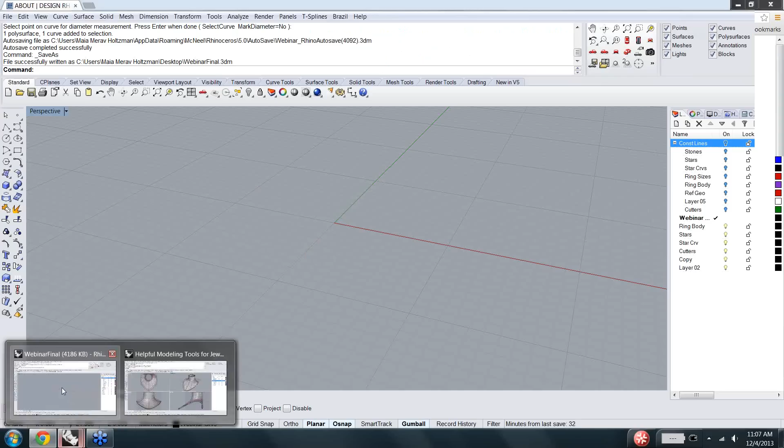And I know that a lot of the feedback that I get from people just getting out of design school is that they always are designing things that are incredibly beautiful and not makeable. So this webinar is going to get into a little bit of how to actually make stuff. I am opening up my Rhino screen here. I'm just going to go into my default four views here.

The first thing I do whenever I sit down to start making a piece of jewelry is get my caliper out. I know that sounds funny because it's a digital format, but my caliper is also digital. I really work a lot with thinking about dimensions from a practical standpoint, so I measure and reference pieces I've already made. I'm constantly thinking about what those measurements are actually going to mean in real life.

The caliper that I use, that a lot of people are always asking me about, is called a Mitutoyo caliper. It's a digital caliper, an absolutely beautiful precision piece of equipment. I recommend that if you are seriously considering making jewelry in Rhino, you buy one of these to have on hand all the time to work with.

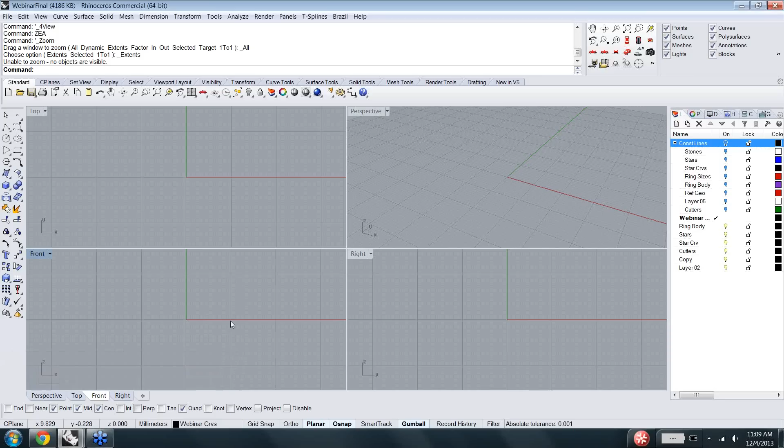The first thing I'm going to do right now when I start building an object is go into a file I've already set up, my helpful modeling tools for jewelry file. I have a bunch of different things in here that I can import into my new file. In this case, I have all of the sized rings already set up. I can choose a 6.5 sized ring, and with Control-C I can copy it to clipboard and bring it into my other file. I'm just clicking here and I have both of these available to me, and in my front view I can just Control-V to paste.

If I just go zoom extents, I have my ring set up in my four views here. And just turning on my grid there.

The first thing I'm going to do with this 6.5 size ring is move it from center to 0. So I select my object, find my center O-snap, and then type in 0, and that moves my profile curve for the inside of my ring shank to 0, which is the origin of my C-plane.

I always try to work around 0. A lot of what we do in jewelry is really symmetrical on both sides, and I like to think that we have the ability to make half of everything rather than an entire piece. Although I have a tendency to want to see the entire piece I'm working on, so I often do work in the full round. But I like to be able to just mirror things across really quickly, so I always try to start working around 0, which is the origin of your construction plane.

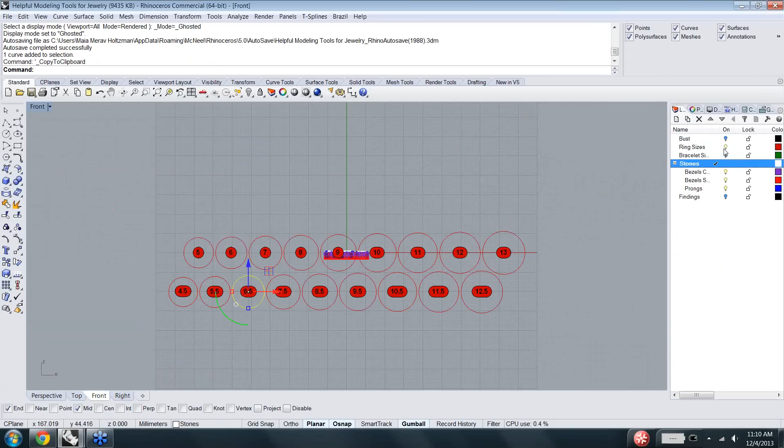The other thing I'm going to do for this particular project is first get back into my four default views, this little window pane, right-click here. Then I'm going to go back into my helpful modeling tools file and grab a stone. I have my stone layer, I'll turn that on, make it current, and turn off my ring sizes. Then let's go into my perspective view.

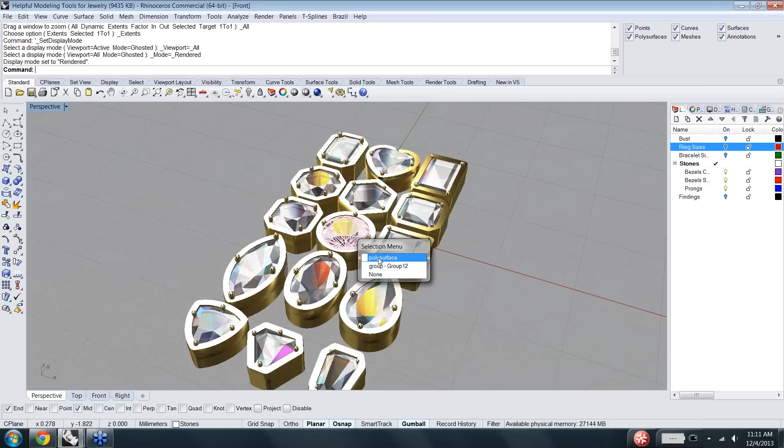If we look at this in rendered mode, you'll see I already have materials applied to these objects. These are a bunch of different bezels that are possible to pull out. In this case I'm not going to grab one, at least not just yet. But I am going to grab this single stone, and again Control-C to copy to clipboard, and then Control-V to paste into my other file.

For those wondering how I have two Rhino files open, if you minimize your initial file, you can then open up a new file. If you just do Control-O to open a new file, or Control-N to open a new file, Rhino will close the original file down. But if you want to have two open at the same time, all you need to do is minimize and then open. So I can minimize those down and grab a new file from my desktop, or start a new template in Rhino 5, and that's how that works.

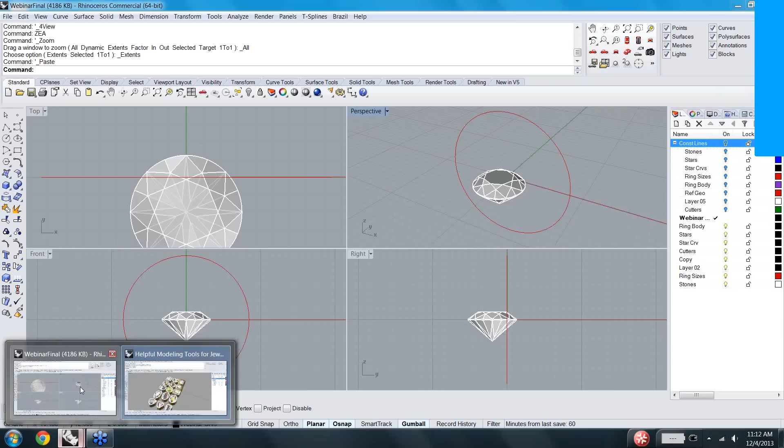So again, with my stone, I'm going to center this around 0 as well. The easiest way to do that, and a way for me to keep the ability to move this stone around, because it's got so many facets, there's no actual center, I can find the area centroid of the object, but if I'd like to find the center of my girdle here, I'm just going to do a circle, 2 points.

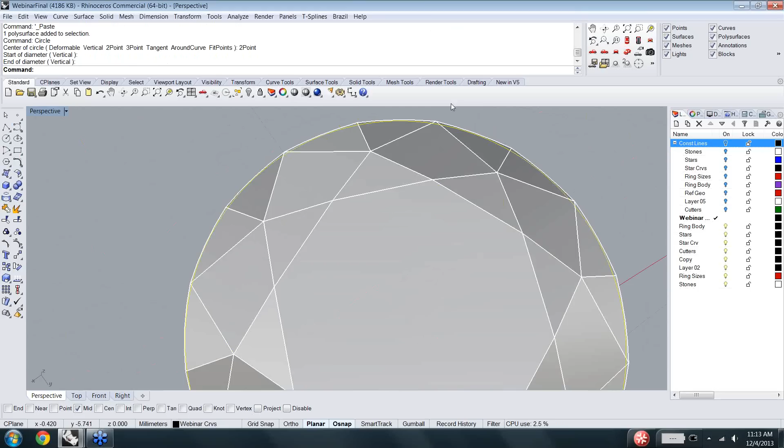The start of my diameter, I'm just going to have my mid O-snap on here. I'm going to go to the mid of one of these little faceted edges, and then I'll drag this around and go to the mid of the other side. You'll see that I've created a circle around what is not actually circular, because this is really a faceted object. But that circle allows me to work as though the stone is circular.

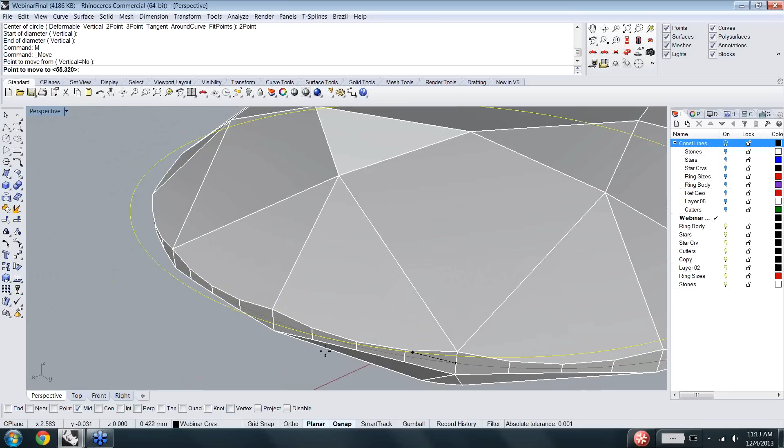So I'm going to also move this up to this top point here. So M for the move command, and then move from mid to end. Let me turn on my end O-snap. Then I'll go ahead and select both of those objects and group them together, so that when I select them, they will be both chosen at the same time, as you can see.

Now I can move my stone from center to 0, and I know that I've actually placed that stone directly on the center. I'll go into my top view for 1 second. You can see that it's really lined up with my axes on the top construction plane.

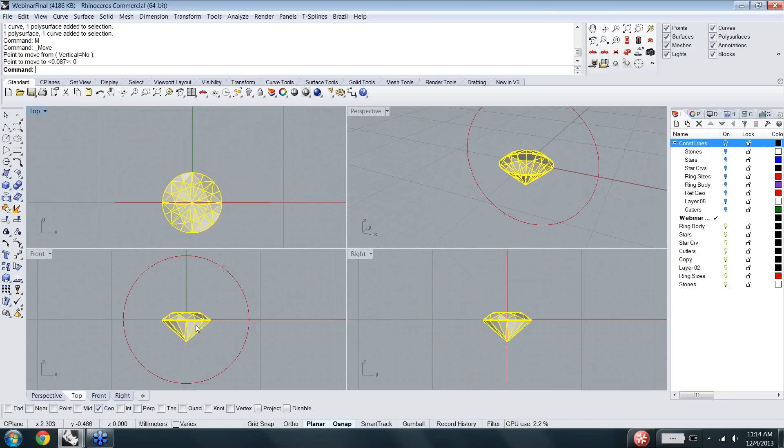And then I'll go ahead and in the front view, I can move this stone with ortho up somewhere around there for now. It's not a definitive placement, but just because for this design I know I want my stone centered.

I'll go ahead, you see that the layer that was imported is called stone, so if I turn that off, the stone will just go away for a little while, and then I can select that curve, which is grouped with the object but on a different layer. I'll change my curve using the change object layer command, right-clicking over my stones layer, going to Change Object Layer, and just changing that. So now that curve is also hidden with the stone.

So when I'm working in Rhino on an actual freelance job where somebody has given me an image, hopefully it's dimensioned, often it's dimensioned improperly or kind of dimensioned, the first thing that I always do is import that image into my Rhino viewports.

So I'll go ahead and do the picture frame command. It's also in your surfacing menu right here, this little multicolored screen icon, picture frame. The other thing you can do is actually drag and drop files, JPEGs, into the individual viewports. But just for the sake of this exercise, let's go ahead and do the picture frame command.

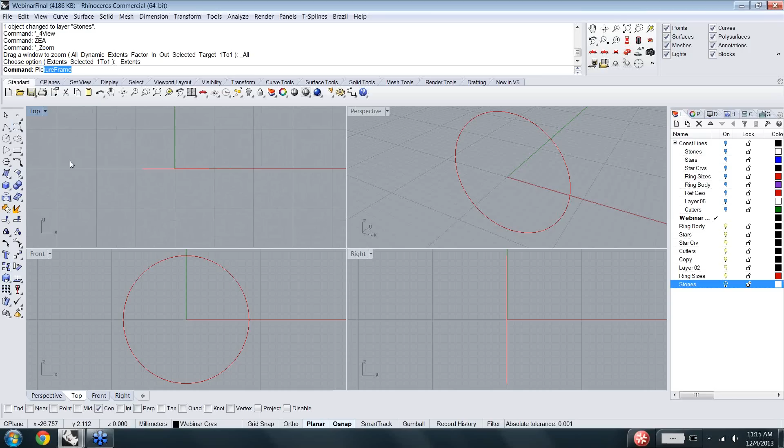This takes me to my desktop, and I have an image here called top, which I've already set up. I'm going to double click there, and then in my top view, I'll start in the lower left-hand corner and drag out what is just a simple planar surface, and left click to set that down in space.

You'll see that I've just dragged in an image that is the top down view, the plan view of the ring that I'm going to be making, or sort of making. I'm going to be making something slightly different, but I'm just showing you guys a bit about how to dimension your images if you're working directly from one.

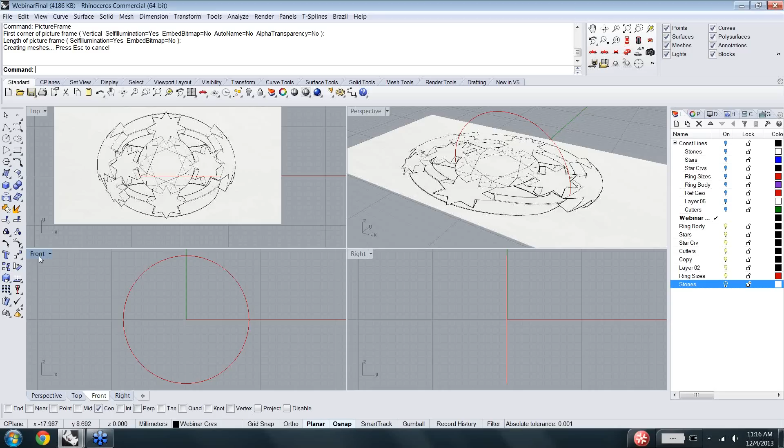So I'll do that in the top and the front view as well. Right-click to re-engage my command, picture frame, front, and then just zoom out a little. These don't have to be exact at the moment because we're going to scale them to make them fit exactly.

And then I'll do the same thing in my right view. Right-click to re-engage, right image, hold shift down for ortho so that you get that nice straight line at the bottom there, and then just drop your image in. I'm going to go ahead and select all of these, make a new layer, and I'll call it picture frames.

I'll right-click over that layer and say change object layer, so that now all of my picture frames are on that layer. Then I'll select all using that layer, select objects, and go into my properties menu, one of my tabbed panels on the right under properties.

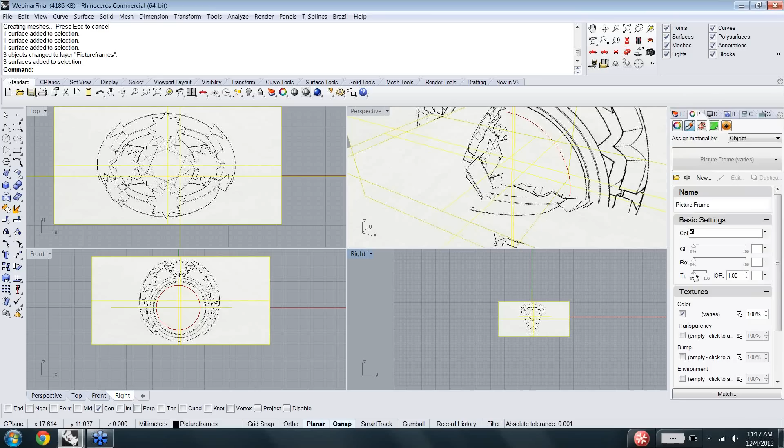I'll select material, and you'll see this picture frame, which is the name of the material. As I start to drag my transparency slider up, I can make these images more transparent so I can see my construction plane behind them, which is really useful. Once I've got my transparency up to about 60-something, depending on the image, I can go back into my layers.

So the first image that we're going to work on in terms of dimensioning is our front. You can see that the actual ring size is already here, and what I want to do is key in my image to the ring size. That's the easiest way to get a really good sense of what it is that we're creating.

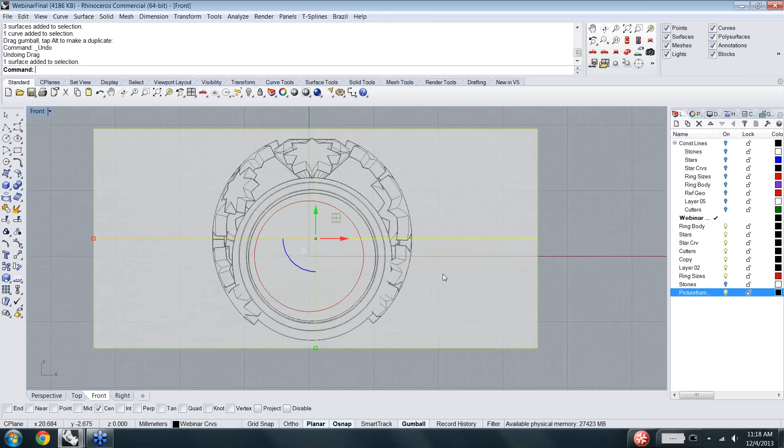I'm going to go ahead and scale this 2D, just sort of eyeing it out. The way I can do that is by turning my gumball on and dragging one of these handles, either the green or the red. Let's scale the picture frame towards the image with the shift key down so it goes in an equal scale. If I don't hold shift down, you'll see I'm just scaling in 1D, so I want to hold shift to make sure I get a 2D scale.

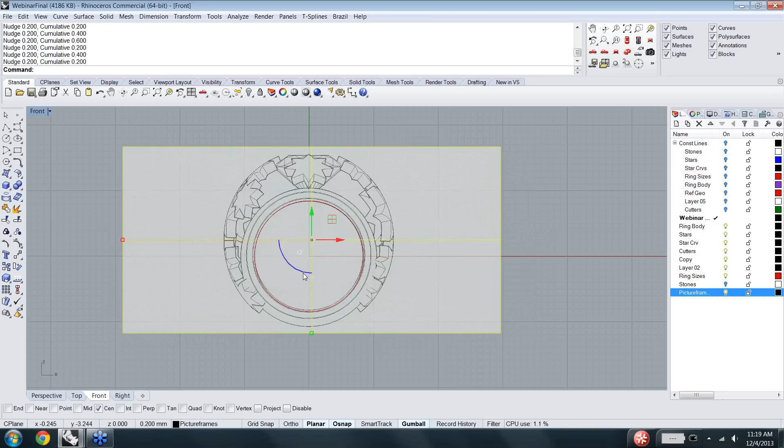I'm going to eye it out first, and just use my nudge keys to move my picture frame around until I get something I'm basically happy with. You can always adjust a little bit more if you feel as though it's not quite right. Once I have it set down like this, the first thing I'll do is trim away the excess.

This picture frame is just a planar surface, so I can treat it as a planar surface. I can use my near O-snap to slide along the edge somewhere, snapping to near using my rectangle corner to corner. It doesn't even have to be perfectly centered, but because I'm OCD, I like it to be. So let's move it over a tiny bit more, then engage my trim command and get rid of the excess on the outside, and then I'll lock this.

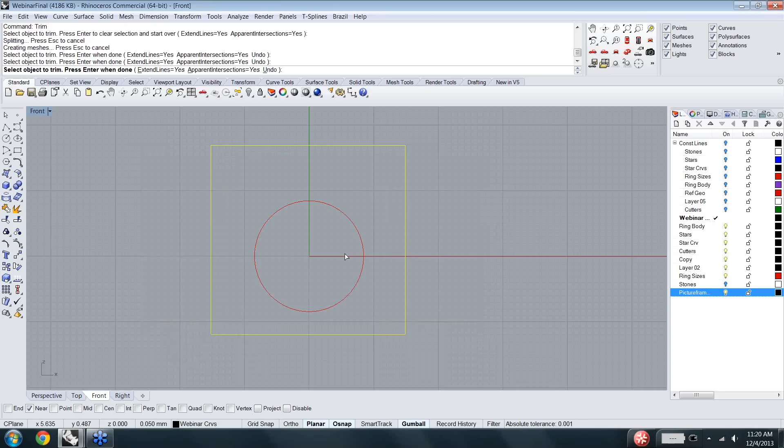So I'll lock my picture frame. That way I can no longer move it around at all. Then in the top view, I'll start scaling this piece down using the first scaled image as a reference point.

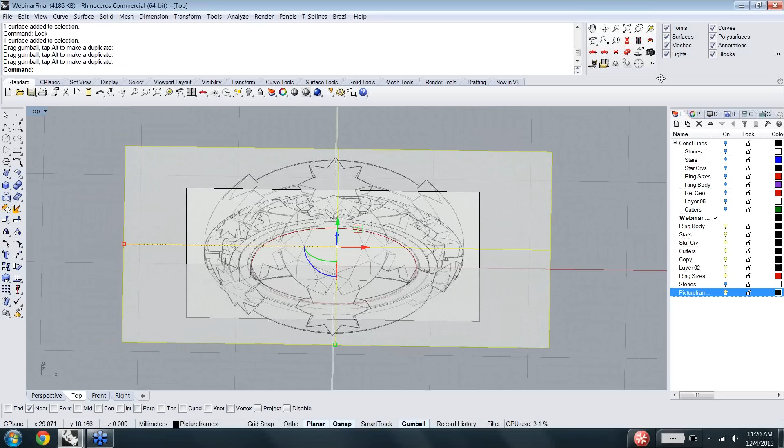Let's just start working on it. Basically, we're working on this without exact dimensioning, which makes it a little bit both easier and harder, I would say. Because I need to find the center of this object, I'm going to add a circle by diameter - circle, 2 points, start of diameter. I'll put my cursor somewhere here, and then very carefully with ortho engaged, drag out my circle until I find what I think is the exterior of that stone.

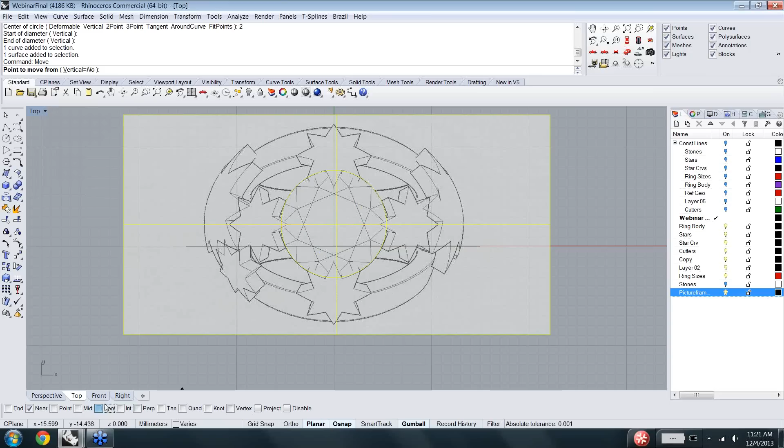If I know the exact size of the stone, that also helps - I can put a circle down and scale to that as well. Now I'm going to orient these two first to 0, so I'm going to move from center of the circle to 0. That just places this, because we can't rely on our picture frame to be centered exactly.

I can't use my mid O-snap - I'm not sure that these are going to be equidistant on either side. So this is going to orient me based on that circle. Then I can go ahead and just see if my edges are intersecting. I mean, they basically are. For the sake of this, because I'm not completely using this for the demo, I would say it's slightly something like that.

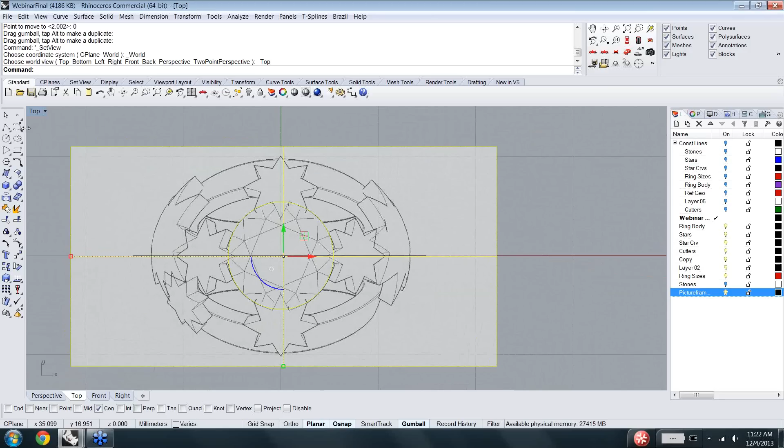Then again, top view, rectangle. We're going to do corner to corner again, so let's have our near O-snap on. Using that rectangle, I can do the trim command, get rid of my excess, enter, and then select and lock.

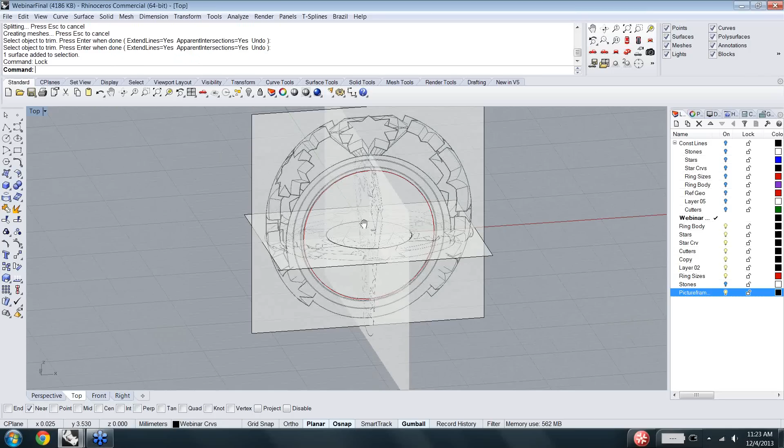So I've now set up these two intersecting images, and this is great just in the sense of understanding the CPlane functionality - so we see why we need to work on different CPlanes, since we have different views that relate to the CPlanes in terms of being parallel to them. So finally, in our right view, I'm just going to hit my right tab here, viewport tab. We're going to do the same thing.

We're going to just move this around a bit. I can go ahead and, using my nudge keys, move that up.

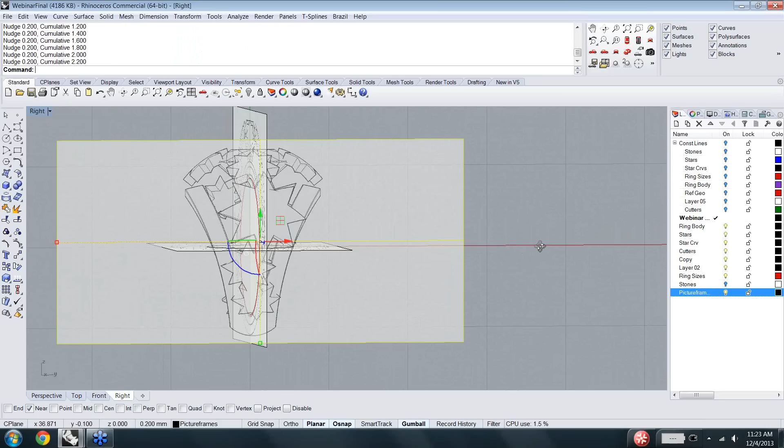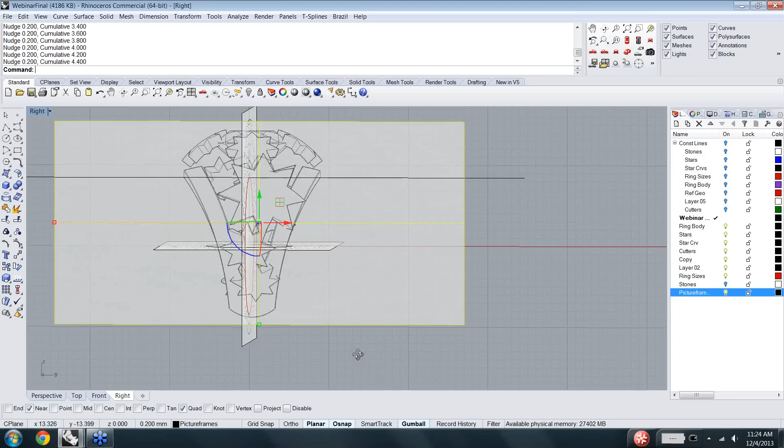I see that this is the interior of my circle, and this is the interior of my circle that makes up my inner ring shank. So if I go ahead and do a line from midsection, or both sides, from the quad point of the circle at the top, and I just drag that out, I know that this needs to be there. And then I can kind of get a sense that now I see that this really isn't large enough. So I'm going to go ahead and scale until I think that I've got it more or less right, just looking at this.

So let's say something along the lines of this. It's not quite perfect, but for the sake of the work that we're doing today, it will suffice. And you can really get this perfect just by keying into specific measurements that you are aware of.

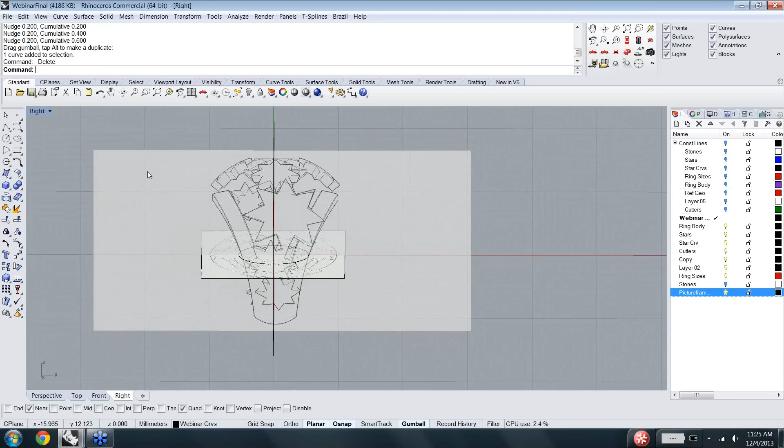So again, rectangle. Let's trim away the excess using that rectangle. And then I'm going to select curves, SelCrv, and I don't need any of those curves anymore, so I'll delete them. I don't want to have to be bothered with them. And everything can be locked.

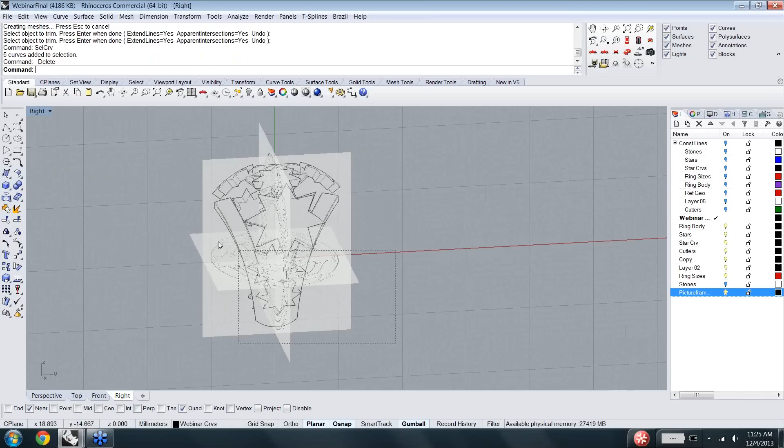So now I have this grouping of images that I can start to work from. I think I actually just deleted my ring size, so I'm going to undo that. And I did. Okay, SelCrv for select curves, and then I'm going to deselect using Control and left click that inner ring size, and then delete my curves. So I have the original ring size that I do want to keep.

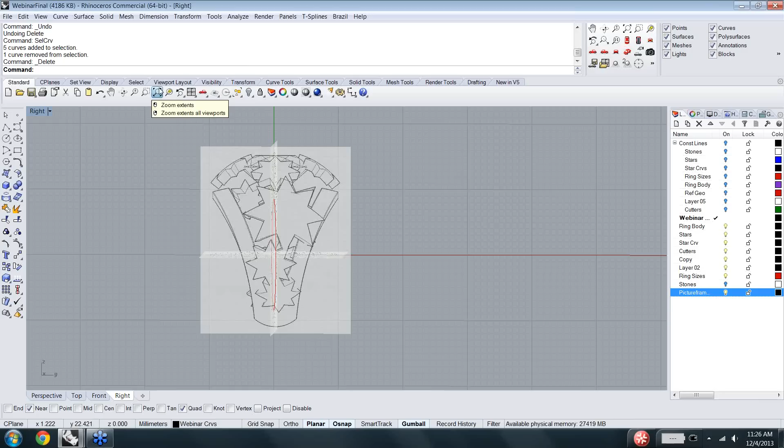And now, for the time being, while I work on this, I'm going to start working in the right view. So zoom extents. I've already created my curves, and this thing goes so fast. So I'm going to bring my curves in with my construction lines layer. You can see that they're slightly different than the curves that are in these picture frames. So I'm going to turn the picture frames off, I'm going to start working on this object as though there were no picture frames. So what we have here, I'll just hide these two for a second,

is what basically is the original setup for building a ring. I'm going to create a single line which defines the height of the base of the ring shank. I'm going to then create another single line that intersects that line that defines the width of the ring shank.

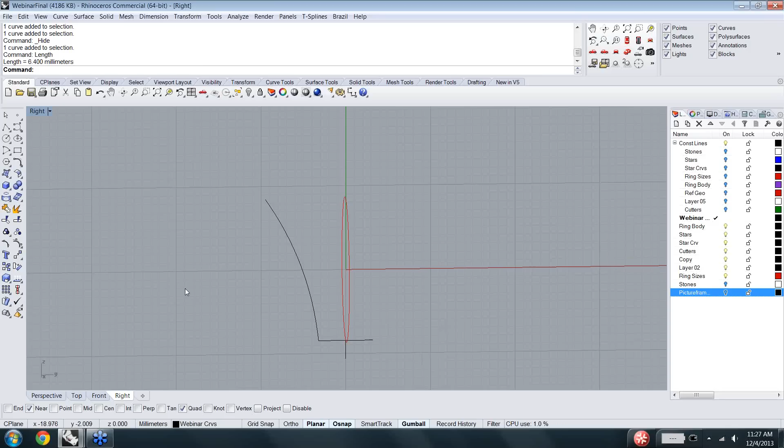So in this case, I have a single line, the length of which is 6.4 millimeters. Why 6.4? Well, it's going to be a big ring, but the 0.4 millimeters is to account for polishing, final polishing. We lose about 0.2 millimeters of material during final polishing of a material like 18 karat gold. And we always have to think about what's going to happen to our models before we even start to build them in terms of how the post-printing processing will affect this object.

So there are two concepts. One is the concept of material loss, which is what happens in the polishing process. The other concept is the concept of shrinkage, which happens in the casting process if we're doing multiple waxes from a mold. In both cases, we are going to want to think about how we build our object before we start building it in order to account for those. And the issue with shrinkage we can deal with at the end of our model making, while the issue of material loss we can't.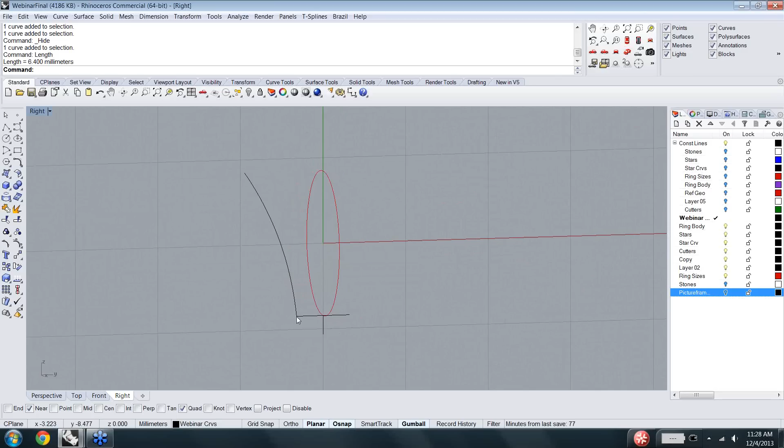So right now I'm going to create my original curve. The way that I built the profile curve for this object is to create two straight lines, 1 millimeter and some each, and then an arc. So I do the arc command and then end, end, and end using that single line object there. Delete one of those. And then I just use Control-J to join these three individual segments together.

And I had my stone in place. Let me bring my stone in from my original model. My stone in place here, this is the actual size of the stone that I'm using. And so I built my curve, the other top profile curve of this object based on that stone.

Then, as you can see, I created a curve here using my curve command or control point curve. And the way that you do that is you just snap to the end here and you start moving out in space. So let's just turn off—you can hold the Alt key down to turn off O-snaps. And then at the end I do want my O-snaps. You can hold Alt down to turn off O-snaps, and then you can let it go at the end to snap to that curve there. What happens with a curve like this is that then once I've created it, I can turn my control points on using F10 or the points on command, and I can start adjusting the curve using nudging.

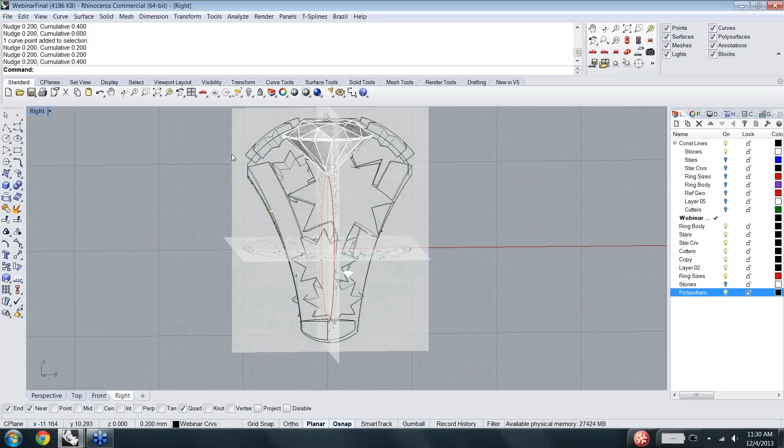I can get this curve to follow the curvature of, for example, my picture frame has a specific curvature, I can actually build that into my image.

Once I have my curve set up the way I'd like, I'll turn those control points off with F11, select last, and do the Fair command. Fair gives this curve a nice smoothing of its curvature with a tolerance, in this case set to 1 millimeter. You see it just adjusts it slightly, setting it up to be a better curve for building objects with.

So if you have a curve that's a little bit wonky, you can always fair it and make it a little nicer. I have my center inner ring shank curve, and this external shape that defines the outside of my ring from the right side.

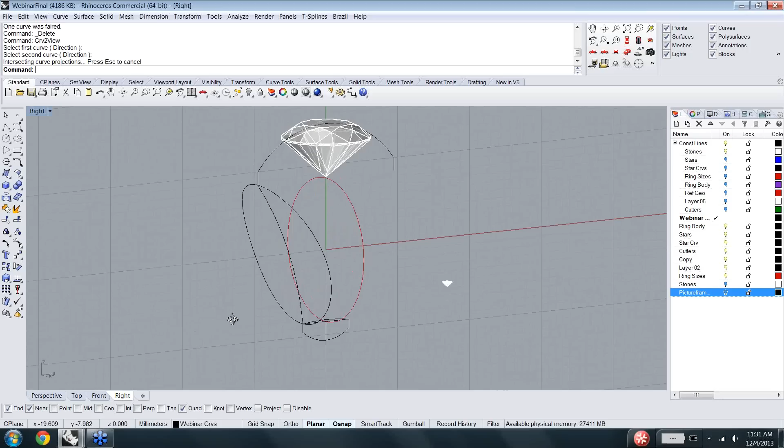I'll do a command called curve from two views, CRV2view. Rhino prompts me to select my first curve - I'll select the red, then select the second curve here. You'll see Rhino's created the external portion of my ring shank using the curvature of that curve to flow this center curve along.

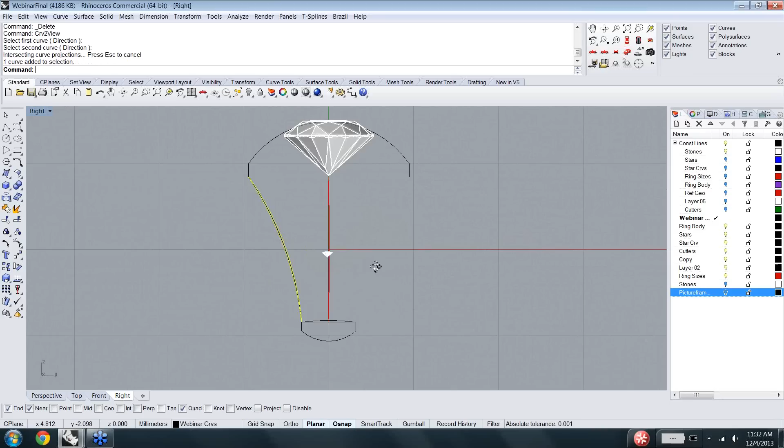This is great because the top portion of these two is still lined up, even though this now has curvature to it. It's not planar. Then I'll go ahead and do the mirror command.

I have mirror in my aliases already set up, but you can find the mirror command in your transforms cascading menu. It's the command I use probably the most of all the commands. In this case we can just mirror across the y-axis, so I'll type in y, and you'll see I have those two edges of my ring now.

The first thing I'll do is take a look and make sure I'm happy with all of these curves. Now I'll change my current layer to ring body, and do a sweep two rails command.

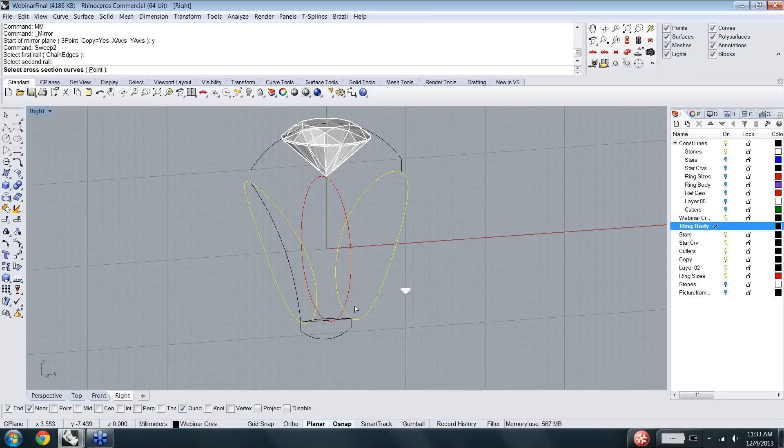Sweep two, select the first rail - always select these on the same side, or you can sometimes get a weird result. I'm going to select this in the back, and this in the back as well. For my cross-section curves, I'll choose this group here and this group here and hit enter. You can see it's used that cross-section to reference and this cross-section to reference.

I'm going to select closed sweep, preview, and you'll see now it's gone all the way around. So for somebody like me that likes to see the entire piece and not work in the half, this is why I choose to do closed sweep.

I'm going to turn maintain height off for this. Maintain height attempts to keep height consistent, but in this case we have two different heights so it can't completely maintain the height - it attempts to find a middle ground between these two sizes as opposed to gradual tapering down towards the smaller size. So I'll keep closed sweep on, maintain height off, and say OK.

And I'm just going to change the color of that layer to green. Not that one though. And there you go.

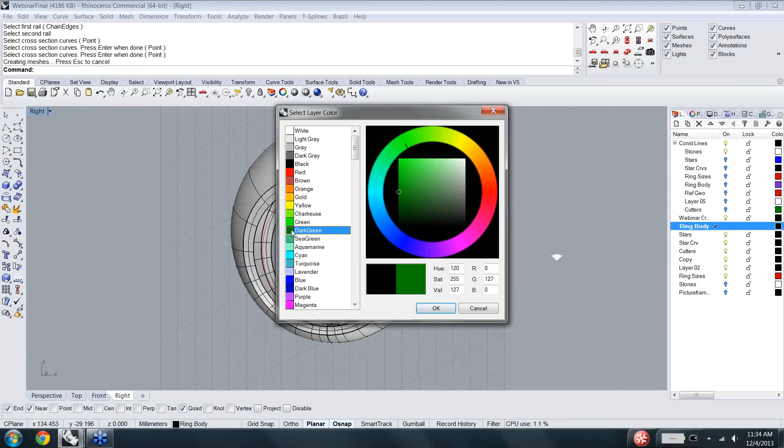Then I'm going to do another sweep two rails using this small curve I've created here. It's another arc - I just eyed this arc out when I built it. I snapped from quad to quad using my quad Osnap, then pulled up with ortho engaged a little bit to create this rounded characteristic.

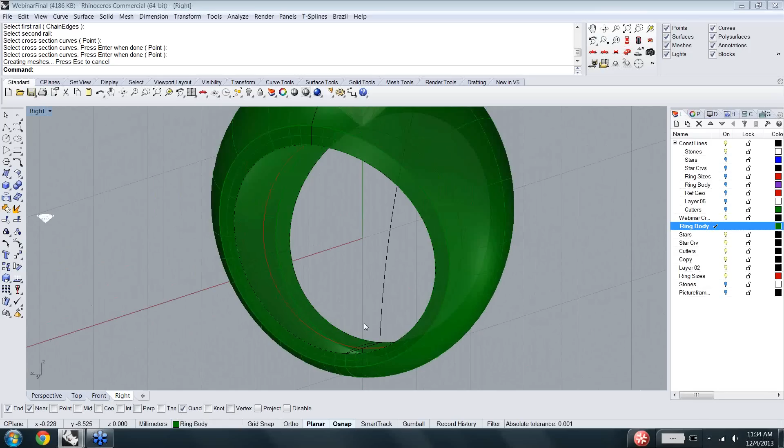It just gives, you know, they call it the comfort fit ring thing. I don't know that that's the nicest imagery in the world, but it is very nice to have a not completely flat interior to your ring, even just in terms of wearing the ring.

So I'll go ahead and do another sweep two.

I'm going to choose my polysurface edges rather than the curves, just because sometimes the curves get messed up. The edges will always maintain tangency with that sweep. Then I'm going to choose that as my cross-section, press enter, and in this case I do want to maintain height, so I'll say maintain height, and close sweep, OK. And you'll see that I've just created the beginning of a ring.

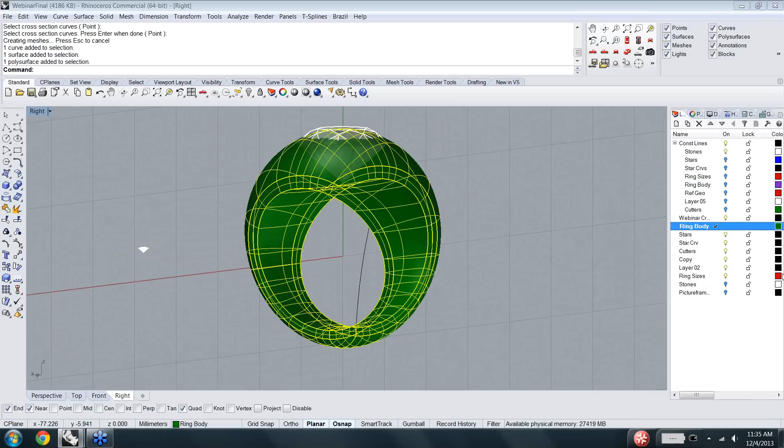Now I'm going to select these and hide them for a sec while I make another interior portion of my ring. So I'll do the sweep to two rails again. Select my cross-section curves, this one is the only one I'll select now. Hit enter and maintain height. So you see that this is keeping the height of the original profile curve, even though it gets larger. This is going to be the interior of my ring.

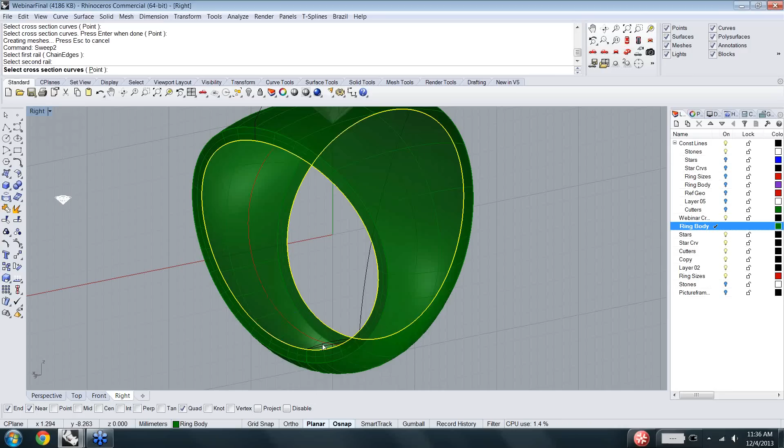I'll say OK, and then again I'll do this sweep using the edges of my poly surface, and using this arc. I can say maintain height again. Close sweep, OK. So this is going to eventually function as the inside of my ring shank.

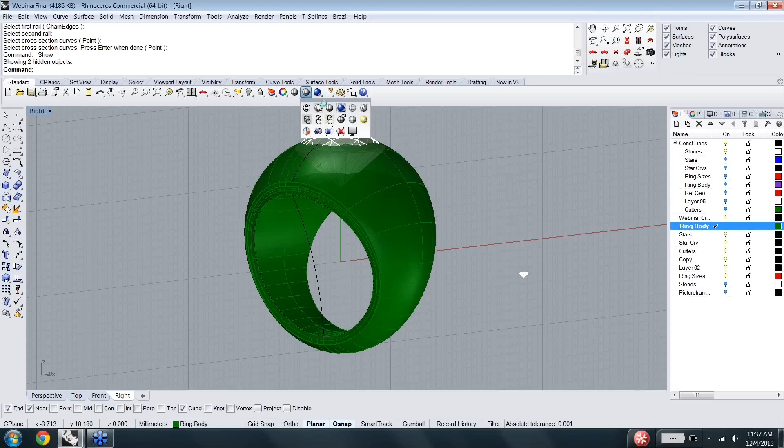What I like to do at this point, right-clicking here to show objects, is just to take a look at my object. In Rhino we have this really nice tool for jewelers, called EMAP. I'm going to right-click on my display modes and go to rendered viewport. I'll right-click there also to change all of my viewports to rendered. And now I'll go ahead and look at the curvature of my object to make sure I'm happy with its shape.

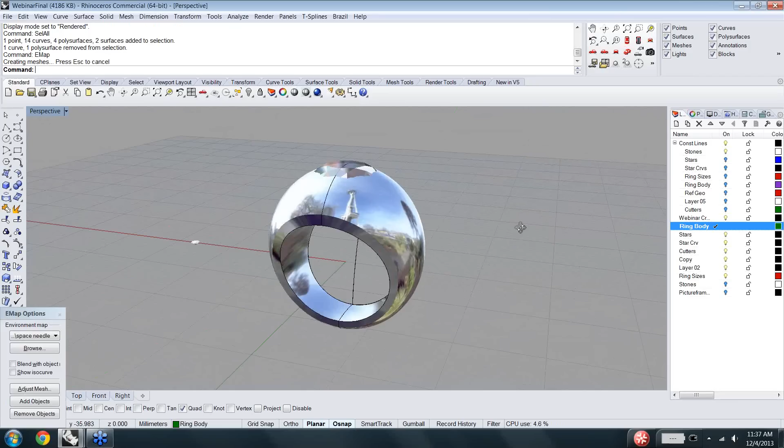I'll go ahead and select all, so SELALL or Control A, either one, deselect my stone, and type in EMAP. You see that we've applied a metallic finish to the surfaces, which has a reflective quality and a light source. This is a really excellent tool for just checking to see if you're happy with what you've built so far.

Assuming you're happy with what you've built so far, what I always do at this juncture, so as not to lose all this information if Rhino crashes, is Control A to select all, then hover over my layer called Copy, right-click, and click on Copy Objects to Layer. And then I will save.

Now if something happens, if I create too many surfaces and my file gets really heavy and my Rhino crashes, I can always find this again on my desktop and it will not be in any way damaged. Sometimes the files when they crash, although I haven't had it happen to me in Rhino 5 yet, do get damaged. And then you hate yourself because you have to go back and start from scratch.

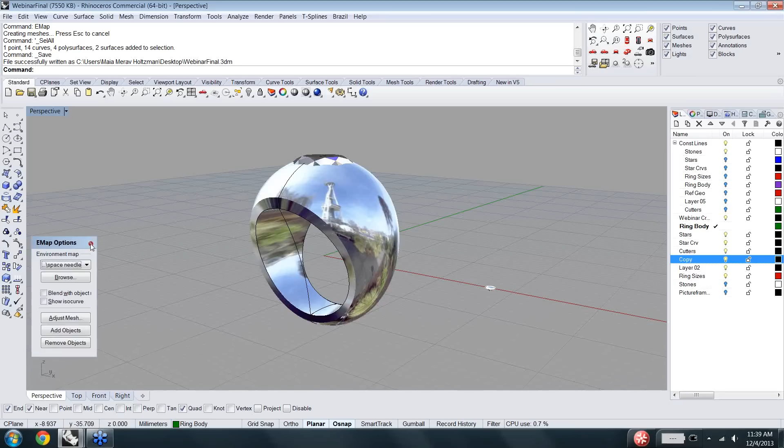So I'm going to turn off my EMAP. You get this little pop-up window, I just click out and it goes away, and I'll go back to my ghosted display mode.

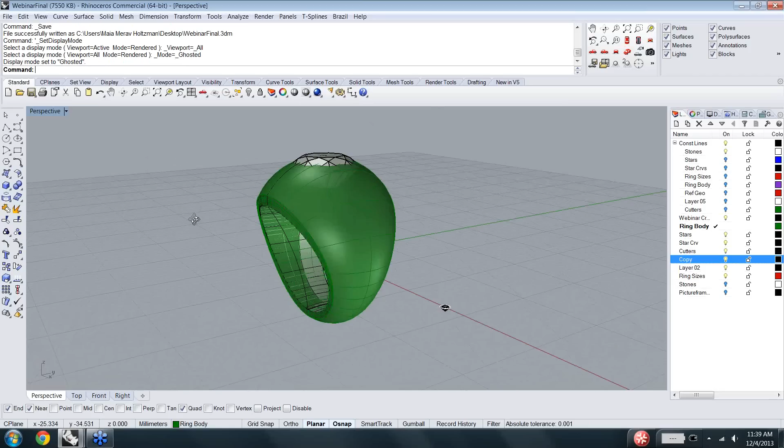The next thing I want to do here is start applying stars to my surface. Now, a lot of you guys know about the project command, project curves. I generally find that's really good if you're projecting parallel to your C-plane, your construction plane, and if you don't have too much curvature. But when you have a lot of curvature, like a ring like this, there is another way to apply motifs to the object that is a little less skewed.

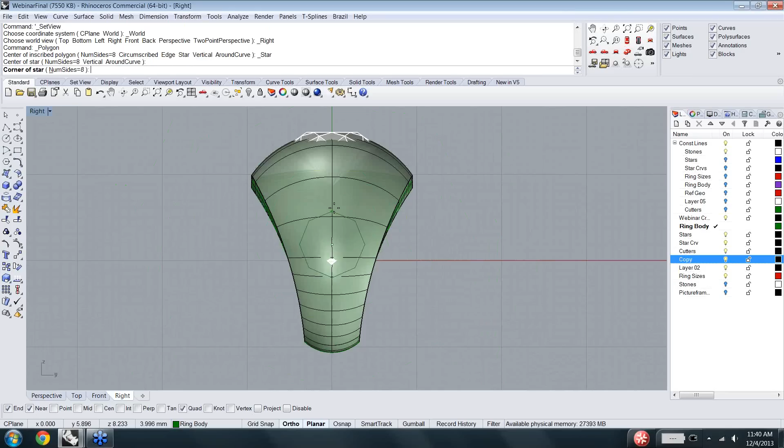So let's say I want to build a bunch of stars. I go to my polygon cascading menu, star. I'm in my right view, let's go into right. Let's say I do the center of the star somewhere here, shift for ortho. I'm not going to allow snaps, I'll shift and alt so I don't have O-snaps, so I can make this planar. But if I do something like that...

OK, so I'm going to just go ahead and go here. Now if I say project, and select my surface here, see how it starts to skew? This to me can be a really pretty motif. In this case it looks really nice. But if it's not what you want, it can be extremely frustrating.

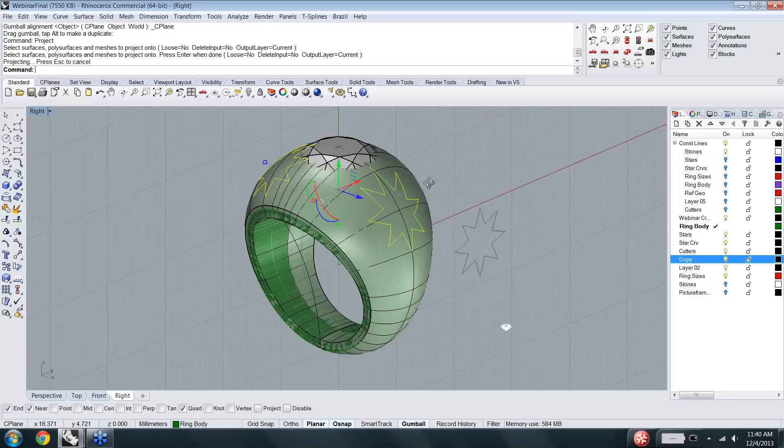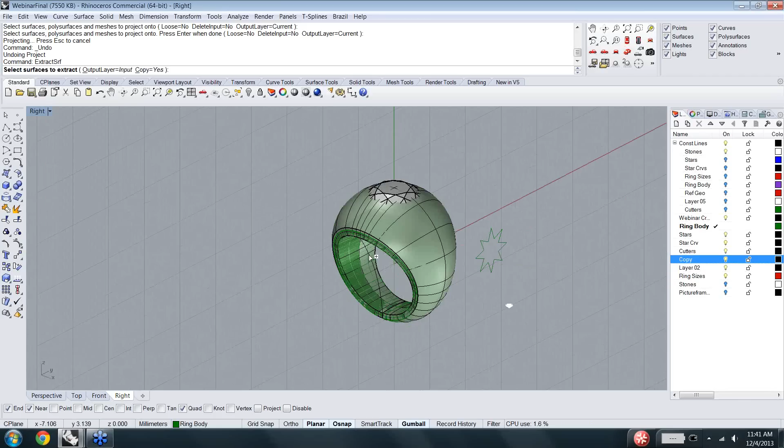So how do you avoid that? It's really late, so what I do in this case is the extract surface command, extract SRF, and make sure copy is toggled to yes. I'm going to extract this top surface here from the poly surface, just grabbing that surface and hit enter. Then I'll go ahead and hide the interior surface.

I know why, because I have my copy on. Then I have this extracted surface, which doesn't have these additional side surfaces anymore, so it's not a poly surface. And I'm going to do something in the top view called the smash command.

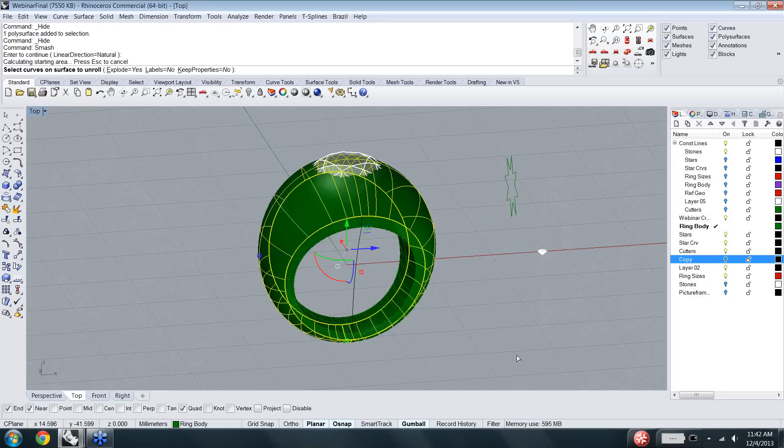Enter to continue. I've selected my curves and hit again. What I've done here now is I've created a flattened surface which basically keeps the UV dimensions of the original surface and some of the shape of it.

I'm going to go into my top view, zoom out a little bit, and for comfort I'll rotate this 90 degrees and drag it down a little bit with my gumball so I can see what I'm working on.

I'm going to turn off my stones layer so I don't have to look at those right now, and turn off my gumball. First I want to find out where the center of this object is, because I want to place some objects in a polar array around the center top stone. So I'll find my area centroid using the Analyze Mass Properties Area Centroid command, selecting that surface. You see that Rhino places a point object right at the center of this surface.

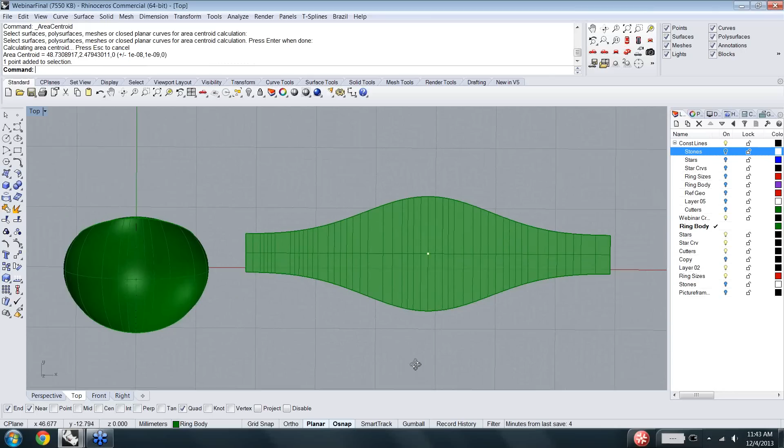Once I have that done, somebody is knocking on my door. That's bizarre.

Once I have this done, I'll do a circle from center. Center of the circle is going to be the point. And then I know that the diameter of my stone is about 10.5, so I'll just click 10.5.

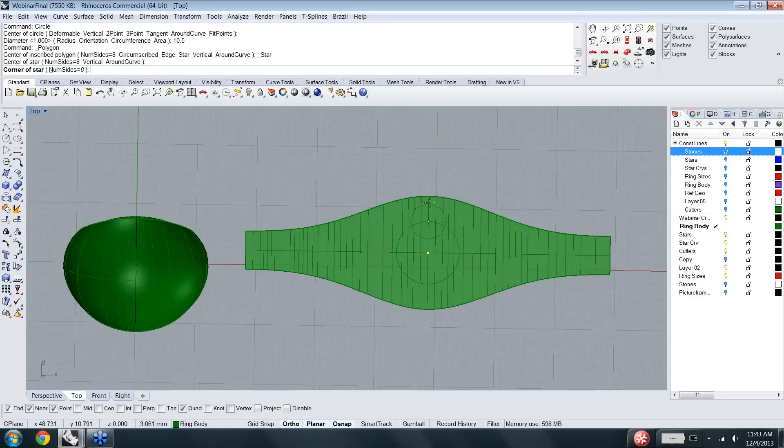Then I will do a star object. Center of star, I'm going to make the quad, and I'll use the edge of this surface, the intersection point, with Shift for ortho depressed. Click once, then start to drag in until I get a shape that I like. Don't make it too sharp. Then click again to set that down.

I'm going to change these curves to a different color so it's easier to see, and I'll start working in my star curves layer. Now I'll just do the Array Polar command.

Center of my polar array is going to be this point, and the number of items will be 4. Angle to fill, or first reference point, 360 is the default. If you just accept that by hitting enter, that's fine. If you don't want to go all the way around, change that, but otherwise the general default in Rhino is going to go to 360.

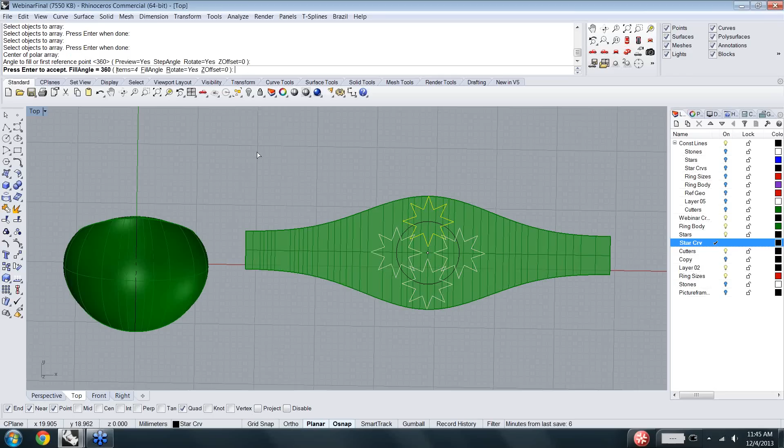Enter again. This is my preview, shown in pink. If I like it, I'll hit enter, and that's great.

I'm actually going to do one more thing here, which is the same command with the point, but this time I'm going to turn on record history. Number of items 4, 360, enter.

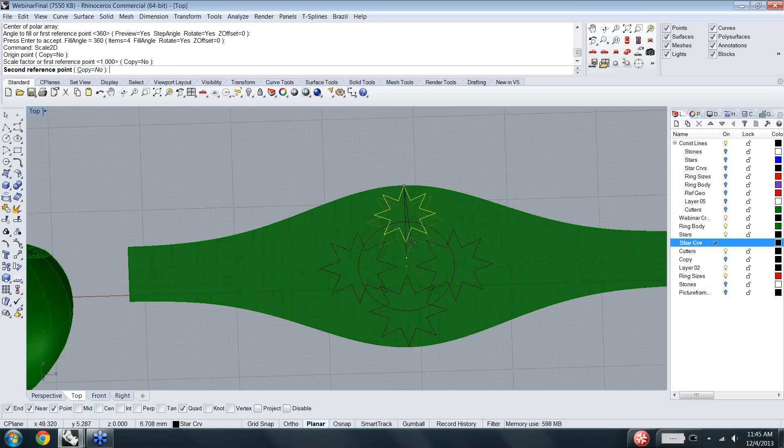Then I can scale this down a little bit because I think these are too big, so I'm going to do my Scale 2D command. My origin point is going to be here at the end, my first reference point will be the other end, and I'll start dragging this down. I can hit Alt to make sure I'm not snapping to anything, and now you see my stars update with the original parent star.

So as long as I don't move any of those, I can change the way they're displayed pretty easily. Now I'm going to go ahead and make some copies of these objects.

Just anywhere. We are so short on time that I'm not going to be able to do as much of this demo as I would have liked to.

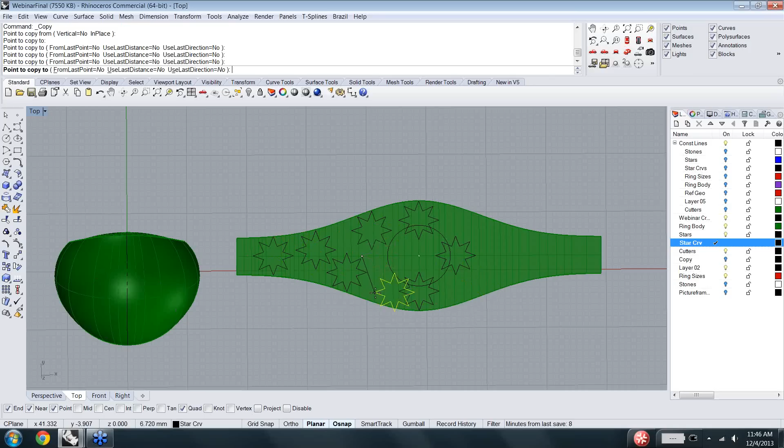So I have a bunch of these star curves or polylines which are set out now. The first thing I'm going to do is apply them to my surface, and rather than applying them rounded, which would deform them, I'm going to apply these rigidly and use them as cutters to get some really nice, sharp surfaces as close as possible to the original shape that I can offset.

So I'm going to use my filter here, just checking to make sure everything is well. Yeah, we're close to the 40 minutes mark. I'm just going to show this one last thing, and then I'll start answering questions.

I'm going to go ahead and grab my curves, right-click here, Select Curves, and then right-click again to bring back this filter tool. You can find that down here to pop it up, and you can dock it.

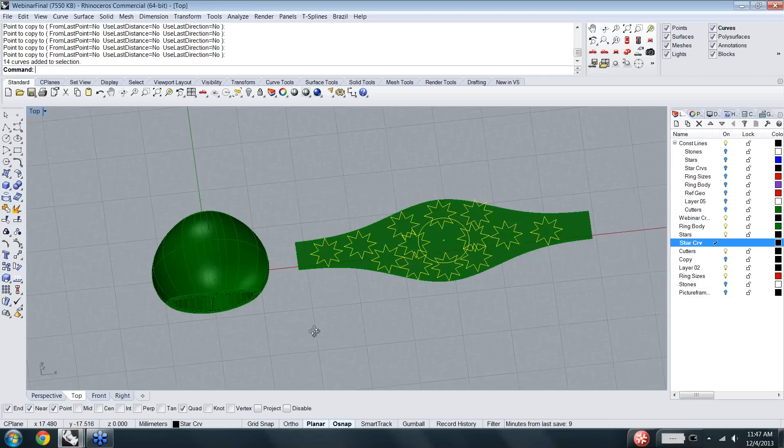I'm going to do the Flow Along Surface command, and I'll use record history on this as well. For my base surface, I'm going to select this corner. I'll make sure these flow rigidly, and click on this corner as well.

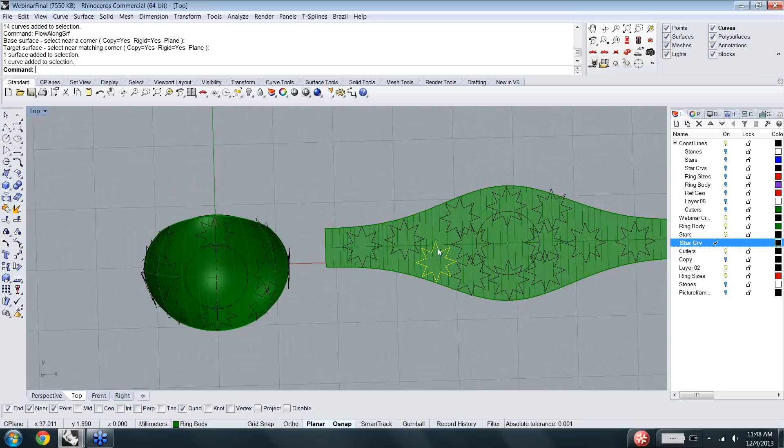What I have here now is a bunch of stars that are not adhering, they're sticking out, not adhering to my surface. What I can start to do is adjust them before I do the trim command by moving these around. So if I select that and want to scale it, watch as I start scaling in, that star scales in. Same thing for this one, but I notice it's huge and it's intersecting with another object.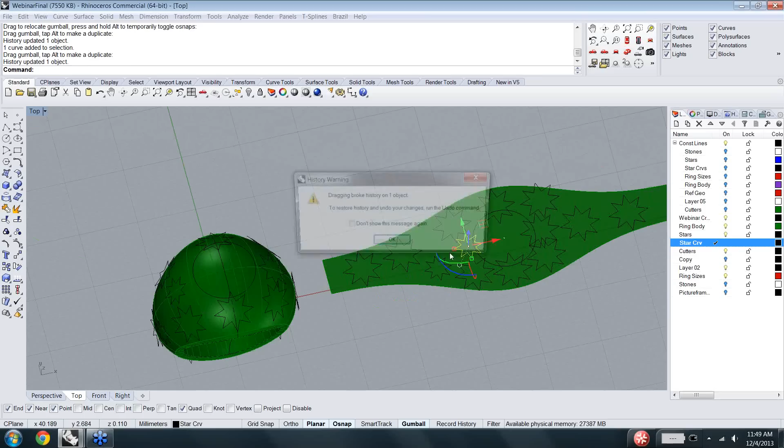I can go ahead and scale in, and it scales in. Once I've done this, I can use my trim command and get some really great shapes. I'm going to start wrapping up now because I know everybody wants to go, and unfortunately we're going to just miss some of the finishing of this object. But I want to talk a little about STL production and stuff like that, so I'll do that in the question and answer session.

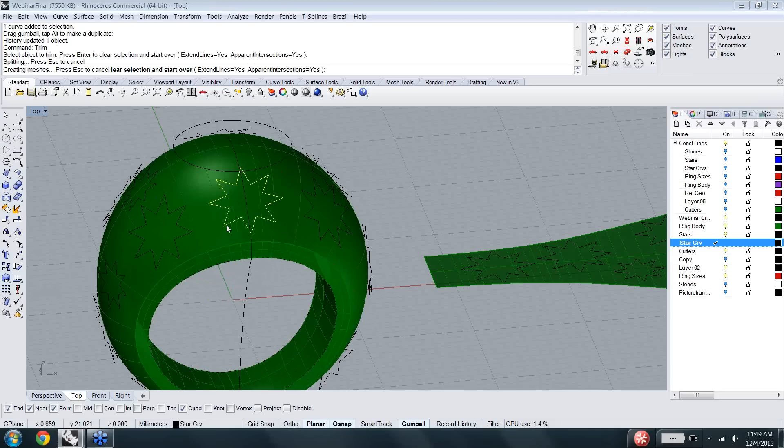For trimming, I would make as many of these extracted surfaces as possible. I'd basically do the copy and place command, which is the right click, and go ahead and trim this surface over and over and over again to create these really beautiful individual surfaces. You can see here that this surface...

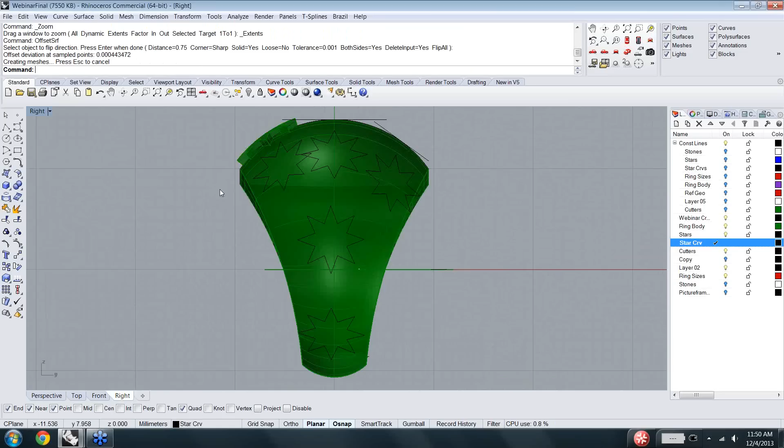That surface now can be offset, so if I go into my right view again, I can do the offset surface command. I'm going to say distance 0.75, both sides, yes, enter. And you see that I have a non-distorted star rather than one of those that gets all long.

I'm going to go ahead and go into the question and answer session, and apologize to you guys because I have so much material to cover here and not enough time to do it, unfortunately. But maybe I'll try to do a little recording of the final steps to finish preparing this ring for production.

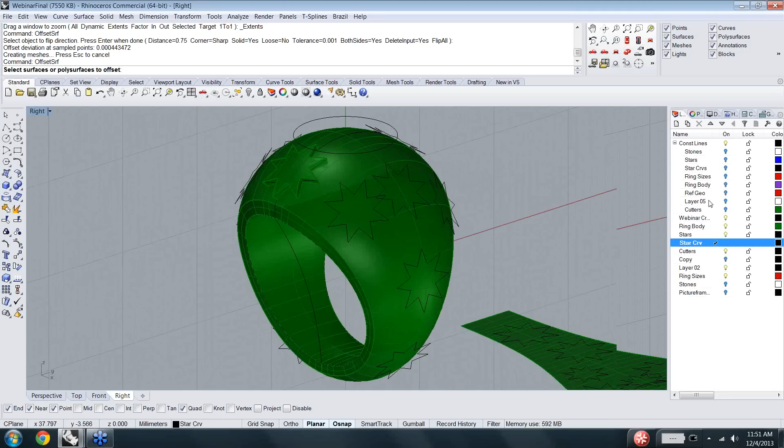I haven't seen any of the questions because I had to keep, you can see, do I have the distortion here on my screen again now? Let me see. No, but you could try it. There we go, okay. Yeah, just a bit. Well, that's good. Off on the side, though, yeah. It is off on the side. All right, so I'm just going to open up the questions and see what people have been asking because I haven't had a chance to look at any of them.

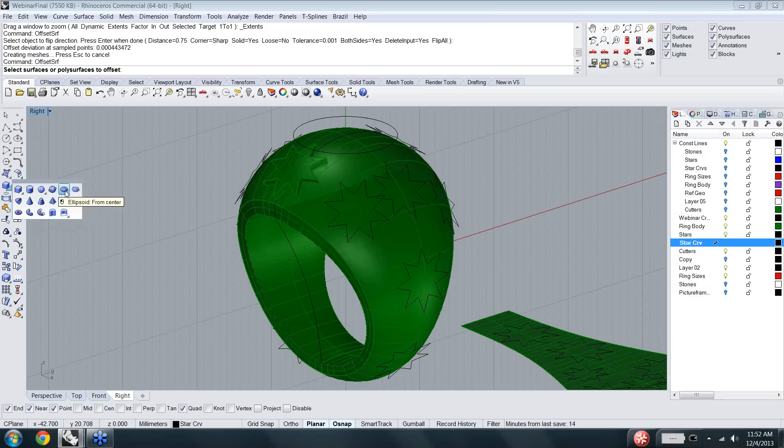In ArtCAM, you can select a closed vector such as a circle and turn it into a dome or a cone with a specified height. In Rhino, you have to craft a sweep or loft, which is time intensive. Is there a better way? Well, one of the really easy things you could do is create a solid object and split it in half. So if you have, for example, a sphere or any of the solids really, an ellipsoid or whatever, if you dimension it out properly, let's just say we knew those were our proper dimensions, then I could do a couple of things.

Let me just, I have this big question thing here, so let me make that smaller. Let me turn off my file here if I can.

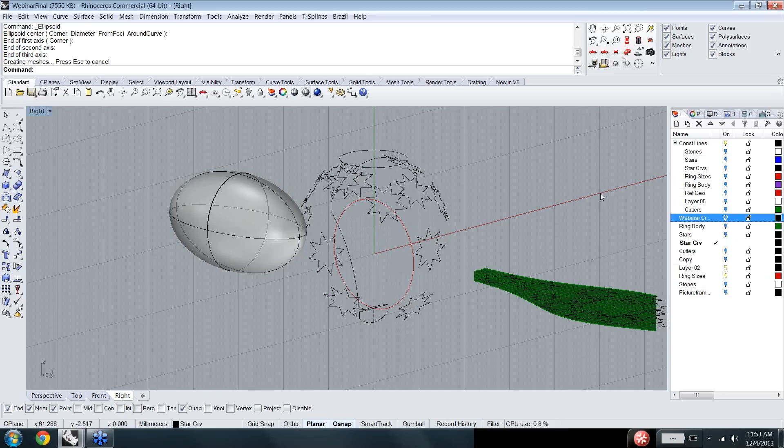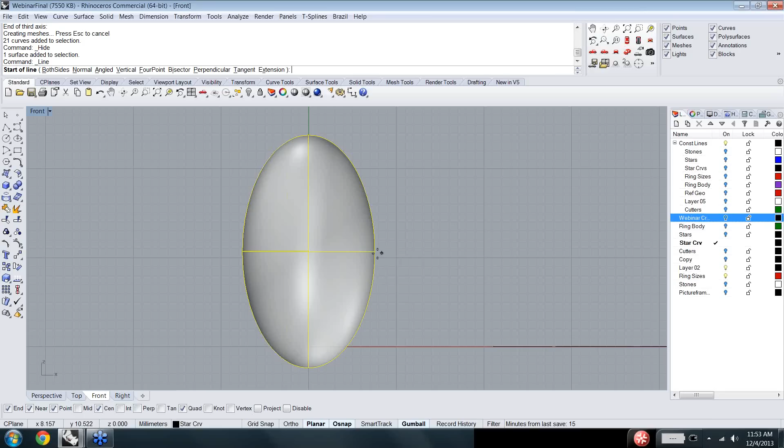So in the front view, if you've got something like this, all you need to do is make a single line segment across it. If you know it's from the center, you can make it from center generally on both sides, and then all I need to do is make a wire cut. So if you know the dimensions, exactly the height and ellipsoidal dimensions of the base of your conic shape, you can just do that. It's pretty easy.

Okay, let's see, I have one from Annie. Let me try to find this one. There's a lot of questions here, but Annie wants to know: are the ring sizes in your file increased by a particular percentage for shrinking that takes place after casting?

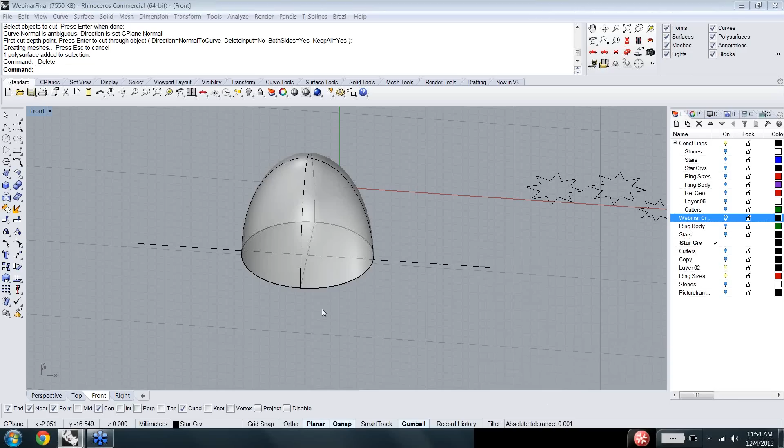No. For scaling, for shrinking, I do the whole object at the end. So the Scale3D command, which is just known as scale if you type it in, I can scale from center. For my scale factor, or first reference point, assuming that the shrinkage is going to be somewhere between 3 and 5%, I'll just scale up. So 1.05 would be a 5% increase in overall size. For me, that's really useful for just doing the whole object at that scale.

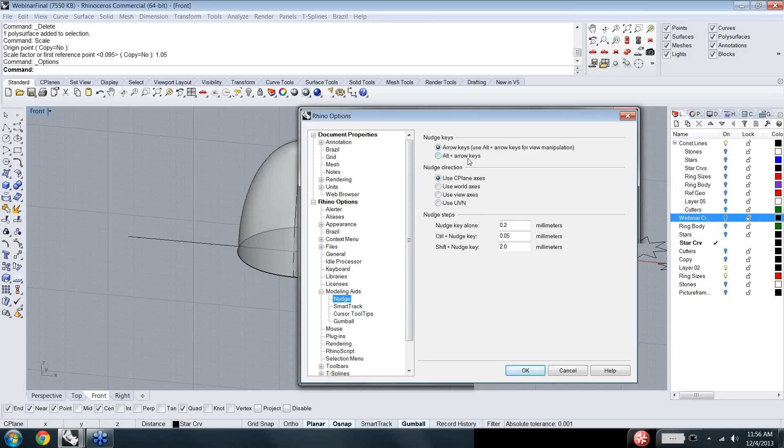Okay, so I have another one right here. It's, what are the nudge keys? When I use the arrow keys, the viewport rotates. So if you go to Tools, Options, and then Modeling Aids, and you open that up, you'll see this nudge setting. If you change your nudge keys from Alt plus arrow keys to just arrow keys, you'll be able to use your arrow keys to move your object around or to move control points around. If you want to use your nudge keys in the default, just hold down the Alt key and use your arrow keys to nudge. Cool.

Eric wants to know, is there a shortcut being used to turn the picture frame layer on or off? A shortcut to turn the picture frame on and off? I just turn it on by clicking on the light bulb. There may be a shortcut. People always know stuff that I don't, but this is the shortest cut that I know.

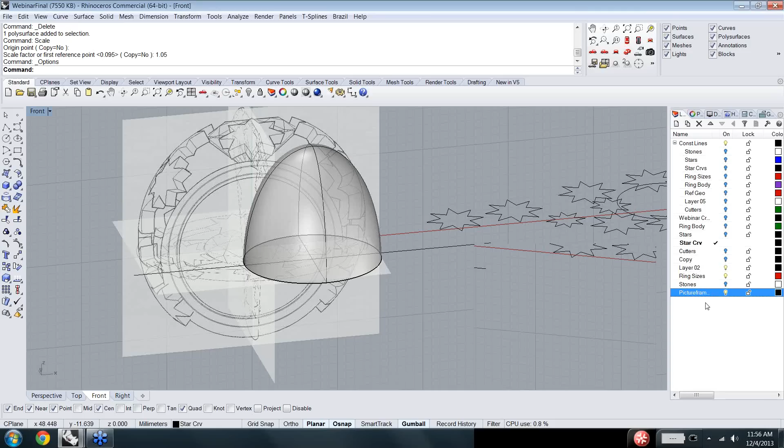Okay, Sil wants to know if Rhino is parametric, like SolidWorks, 3D Design, or Creo. It is not parametric. It's NURBS-based, but we have a parametric plugin called Grasshopper.

Cool. Joshua, so let's see. Seeing the smash surface / layout / flow along surface workflow was neat, but why not just splop the star shape to avoid the distortion from projecting? The reason I wanted to demonstrate this, and I didn't get a chance to do it, is because I want to be able to adjust my objects once they've been flowed along the surface. So if you don't need to worry about adjusting these objects, then the splop command works great. But if you have to place them and then start to take a look at how they interact with one another, I use record history with my flow along surface command in order to increase the size, decrease the size, move them around, and they will follow along that surface perfectly, so I don't have to worry about any kind of going back and forth workflow.

Cool. Sabra mentioned, I don't know if you talked about this already, but digital caliper name? The digital caliper name is Mitutoyo.